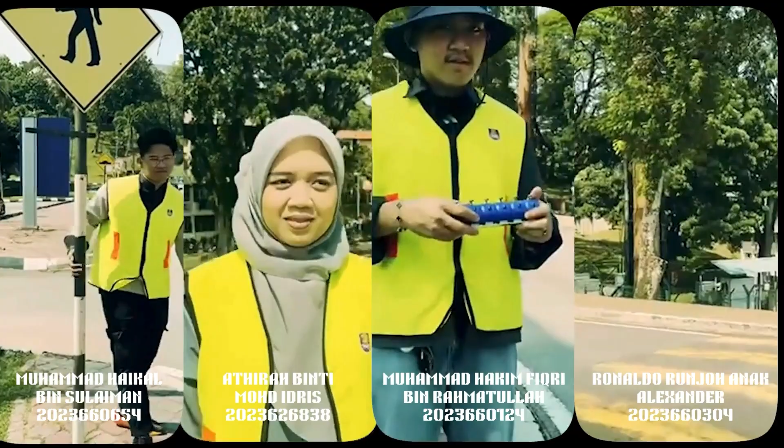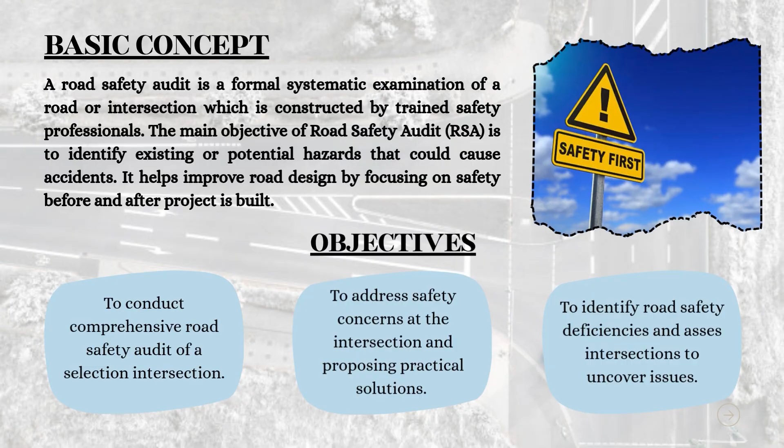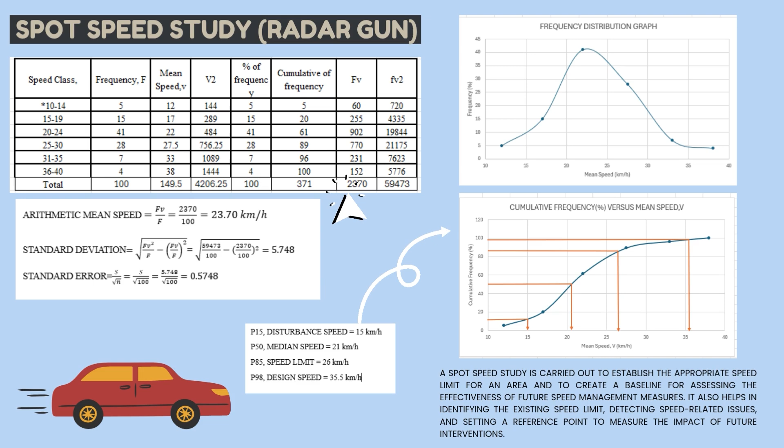So next is about speeding. For the speeding, we will use the speed radar gun in order to capture the speed of incoming vehicles. And for the result of the spot speed study by the radar gun, we can obtain that the highest speed class is between 20 to 24 km per hour, and the arithmetic mean speed is about 23.7 km per hour, which is slightly below the average speed requirement in UiTM, which is 25 km per hour.

So there is a slight problem with the area, which is the small and unclear speed limit signs, which create uncertainty for drivers who may unintentionally exceed the safe speed. So this poses a significant risk, particularly near the junction or the bus stop. Without clear signage, drivers will lack guidance on the appropriate speed, increasing the likelihood of accidents and hazardous situations.

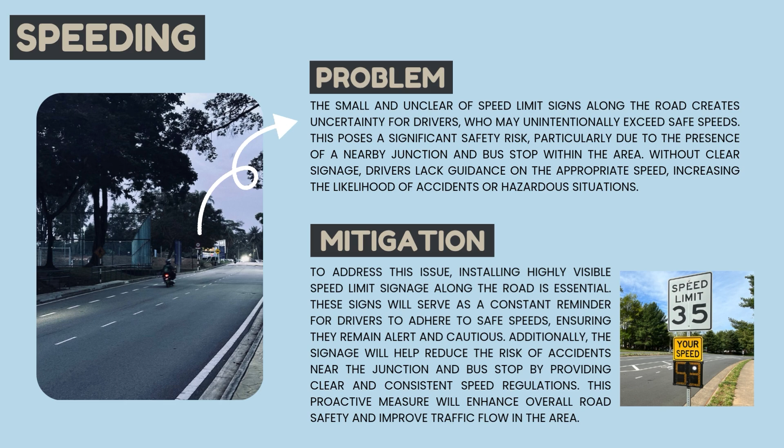So, in order to address this issue, installing highly visible speed limit signage, like in the picture, will keep drivers alert and cautious. Additionally, the signage will help to reduce the risk of accidents near the junction and bus stop by providing clear and consistent speed regulation. This proactive measure will enhance overall road safety and improve the traffic flow.

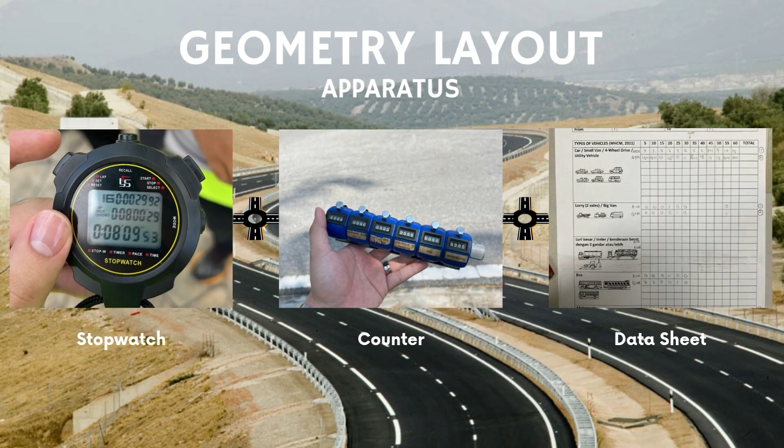We will examine the College Perindu Junction through its geometric layout. The apparatus used for this lab work are stopwatch, counter, and datasheet. By using the junction capacity study procedures, we begin with safety briefings and equipment checks, including stopwatches and traffic counters. The observation points near College Perindu gave us a clear view of all movements, labelled V1 through V6, for systematic tracking. For 30 minutes, we recorded vehicles in 5-minute intervals, categorizing them as motorcycles, cars, or heavy vehicles. The structured approach ensured reliable data for our analysis.

Second, faded road markings confuse drivers, especially during peak hours. Third, crosswalks placed too close to the intersection create conflicts between turning vehicles and pedestrians. Lastly, the junction has two entrances and exits, making it confusing for drivers.

Hence, our proposed fixes: widen curbs to 8.5 meters for smoother turns, repaint markings with retro-reflective thermoplastic for day and night visibility, relocate crosswalks 5 meters back to give drivers more reaction time, and merge the lanes into a single lane to avoid confusion.

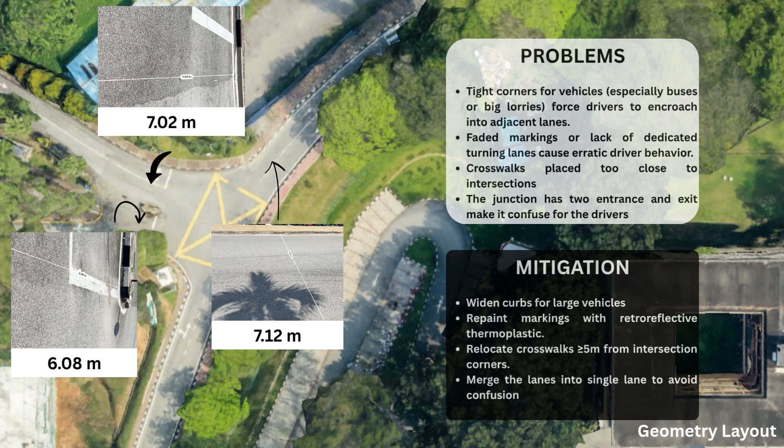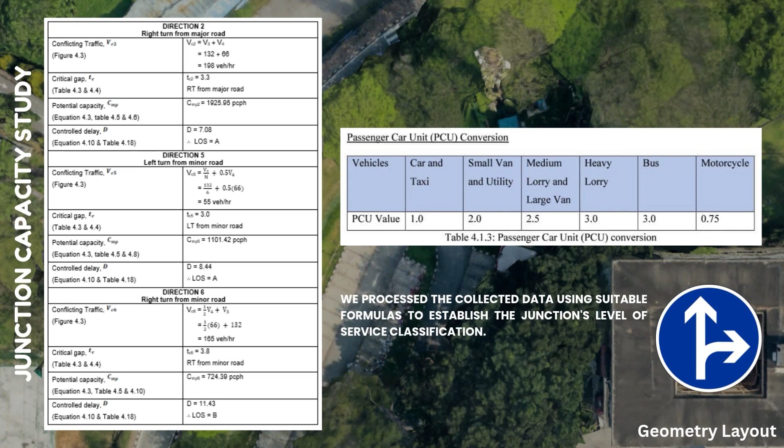These are the data collected. For example, for the right turns from the major road, the conflicting traffic volume is 198 vehicles per hour. The critical gap is 3.3, and the result for potential capacity is 1,925.95 passenger car units per hour with only 7.08 seconds delay, earning a level of service A rating. This means the junction currently handles right turns efficiently, but geometric improvements will make them safer too.

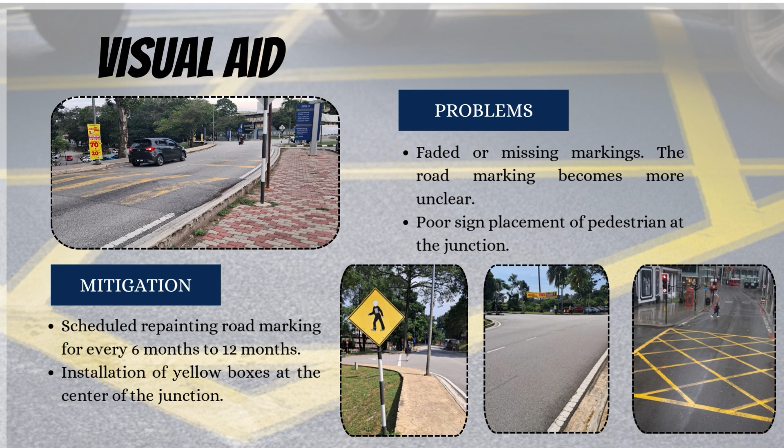To address the faded markings, we propose scheduled repainting every 6 to 12 months. This ensures road users consistently receive clear visual cues, which is critical for both safety and traffic flow. Additionally, the installation of yellow boxes at the center of the junction will prevent vehicles from blocking the intersection, especially during heavy congestion. This also increases drivers' awareness of key movement zones.

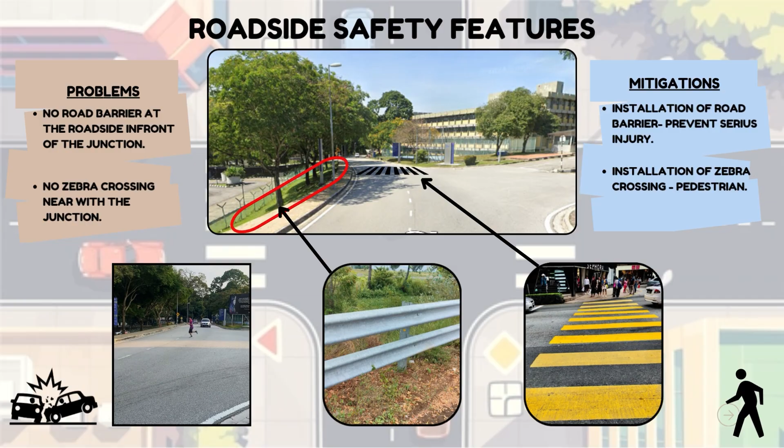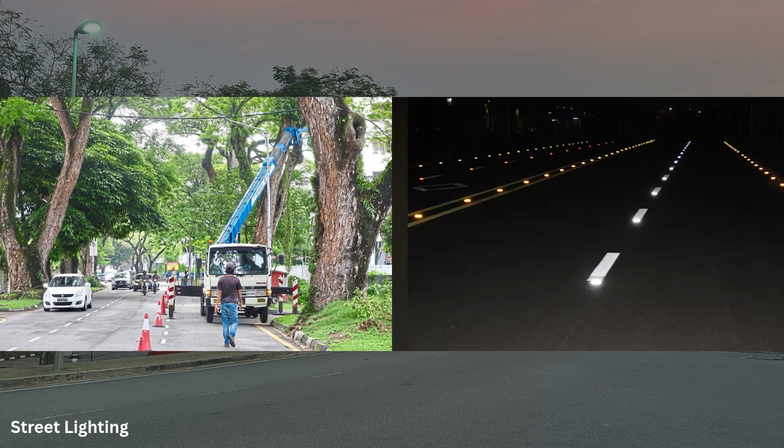Bright spots directly under poles contrast with dangerously dark zones in between, creating what we call the tunnel vision effect for drivers. The good news, these problems have proven solutions. First, we recommend quarterly vegetation trimming. It is a simple but effective measure to ensure lights can properly reach the roadway. Second, strategic infrastructure upgrades by adjusting pole heights to 6 to 8 meters and maintaining 20 to 30 meters spacing with uniform illumination. Third, for immediate improvement, we propose retro-reflective road markings and zebra crossings. This bounces headlights back to the drivers, compensating for any remaining lighting gaps.